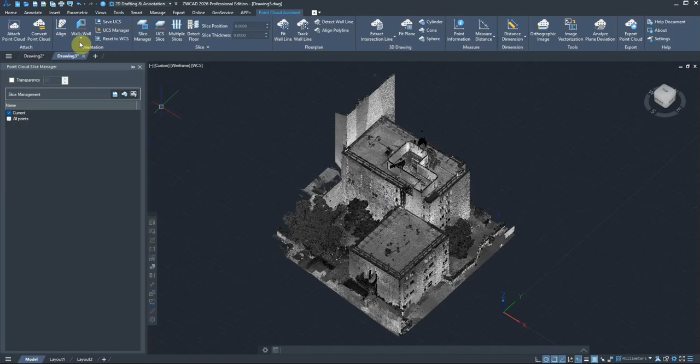So to orient a point cloud, we have several options. For this exercise, we'll slightly sabotage this one, which is already nicely aligned in the world coordinate system. As you can see, it's perfectly perpendicular right here. So we'll just select it, go here to the grip and apply a random rotation, something like this. There we go. We now have a point cloud that's misaligned.

Now, going into the point cloud assistant, I can align it within the WCS. It's really important to distinguish this feature from the others, because this one actually rotates the existing point cloud within the world coordinate system. All the other features let us create a UCS, a user coordinate system, without touching the original position of the point cloud.

Now, all these features here on the right are going to be really useful for people working with georeferenced point clouds. And for those who don't necessarily need that, they can always use the align function. So let's go with the align function first to square up this point cloud within the WCS. I'll click align.

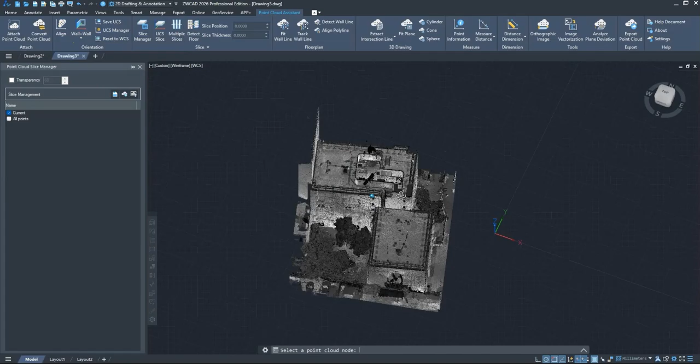Now I have to select a point from a cloud part making a plane surface. Let's click on a point of this wall right here. And that's it, it's already done. As you see, it only took me one single click on my point cloud to square it up again in the world coordinate system, because I selected a point on this group of points that form a flat surface.

Alright, let's switch to top view. You can see I'm still in the WCS and my point cloud is now aligned. So let's go back to a misaligned one to show you the next features. Okay, there we go. And let's say now that this position is the original building orientation and we have to keep it as it is in the WCS. So in this situation, we have to work with the UCS, the user coordinate system.

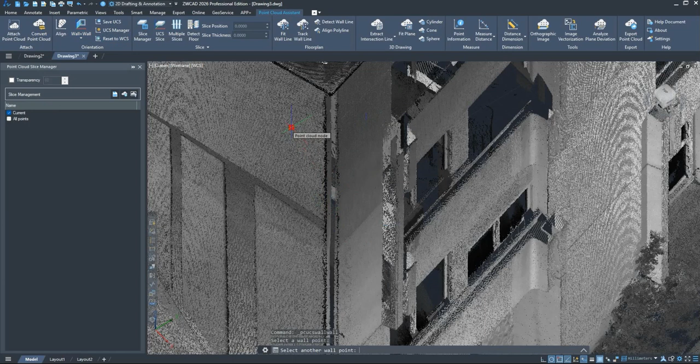And here is one of the most practical features, wall plus wall. I'll click on it. And now all I have to do is to spot a point cloud region with two perpendicular walls, like here, and select a point from one side. And then it prompts me to select a point on the other side. And that's it. We have just created our first user coordinate system.

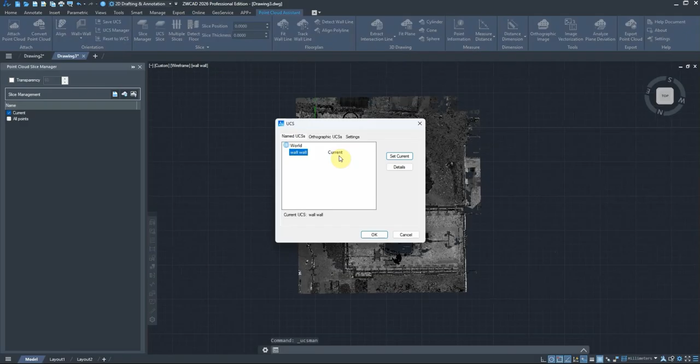And now as you can see, it's still unnamed UCS. So it's prompting me to give it a name. So let's call it simply wall wall. Alright, so we are now on our user coordinate system called wall wall. And you can manage your UCS by going here on UCS Manager. Here you can set different things such as renaming, editing, or deleting your several UCS.

Okay, perfect. So now, let's imagine I have a point cloud where there's no perpendicular wall. So what can I do if I'm not in a situation with two walls? Well, in that case, I can just go back here, click on the small arrow to open the drop-down menu and choose floor plus wall.

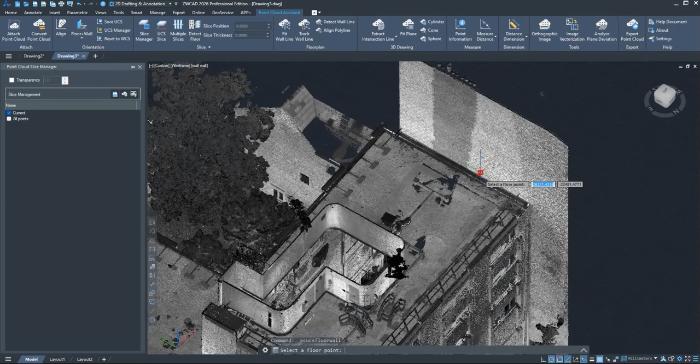So for a floor and perpendicular wall, I'll take the flat roof here, for example, and then the brick wall just right here. And again, a new UCS is created and it prompts me to give it a name. So let's say wall floor this time. And here we go. As you can see here, I am indeed in the UCS called wall floor.

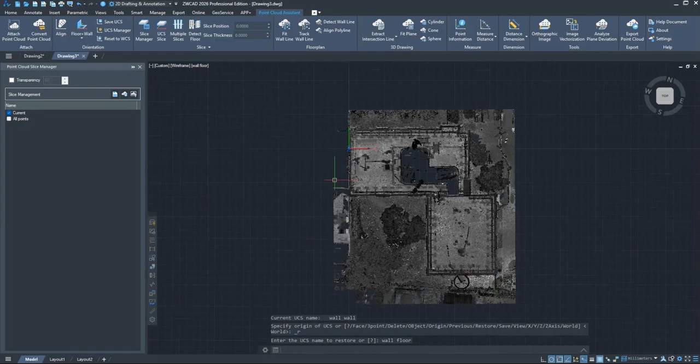Now if I want to switch quickly between the UCS, it's very simple. Just click here, go on custom UCS, and you will find all the UCS you've created. So as you can see, it's very convenient and it has been designed to let you quickly navigate between your different custom UCS. And of course, if you need to go back to the world coordinate system, you can do it from the same place here by clicking on WCS.

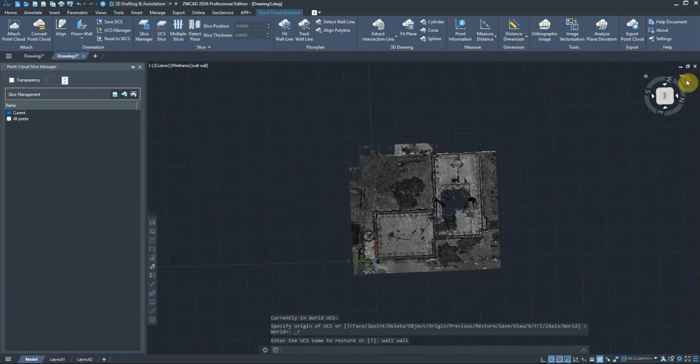And now I can check again that the original building orientation has been preserved. And then it's very easy to switch back to the custom UCS and continue working on the point cloud. I can also save the current UCS by clicking here. Let's call it current UCS. And if I check my list of custom UCS, I now have the third one we've just created.

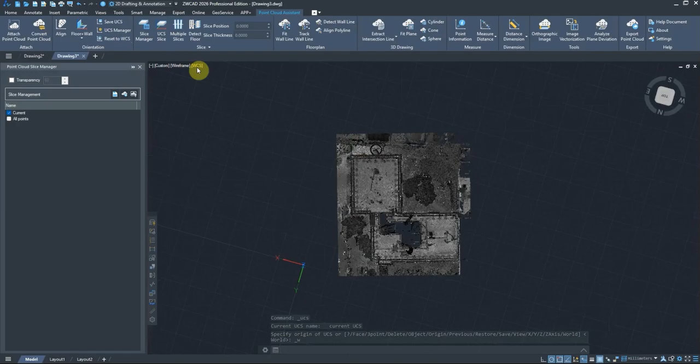Okay, so let's continue with the last feature of the orientation section, reset to WCS. Actually, it's very simple. It's just a shortcut button that allows you to go back to the world coordinate system. That's it. Nothing more, nothing less. So it's just another way to get quick access to your WCS.

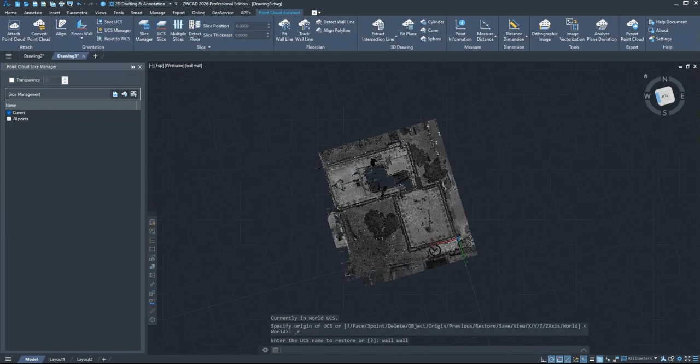Alright, I think we've now covered the whole orientation section and gone through all these features. So just to summarize, there's one key thing to remember: the align function actually applies a rotation to the point cloud, while the other UCS buttons don't change the building orientation. Now that we've correctly oriented our point cloud and created several UCS, we are now ready to perform slicing operations.